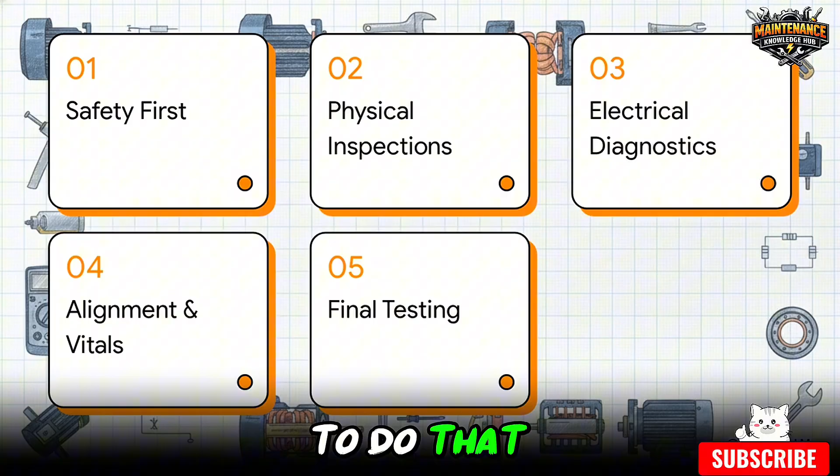To do that, we're going to follow a precise journey today: safety first, physical inspections, electrical diagnostics, alignment and vitals, and finally final testing. Let's get right into it.

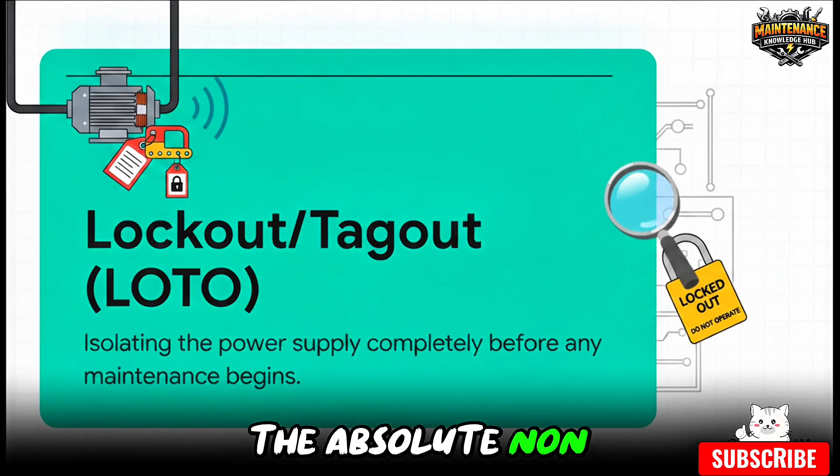Phase 1, safety first, preparing the motor. The absolute non-negotiable rule here is LOTO, lockout tagout. You already know the drill, but it's the vital safety precaution of isolating the power supply completely before any maintenance even begins, making absolutely sure zero power is flowing to our patient is the foundational step of everything we're about to do.

You've got to strictly follow these 5 steps. Switch off and isolate the power, apply your LOTO tags, and—this is the one that always seems to get missed—verify zero voltage with a proper tester. Don't assume. You also need to gear up with the appropriate PPE: safety shoes, gloves, helmet, and goggles. Finally, wait it out and visually confirm the motor has completely stopped rotating.

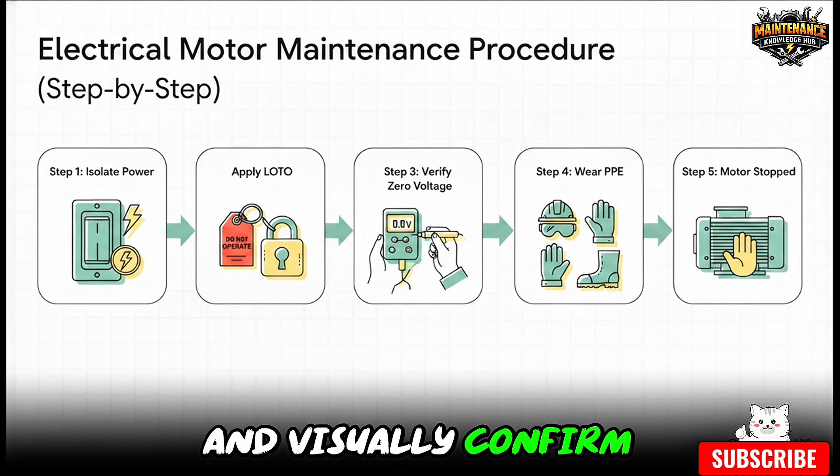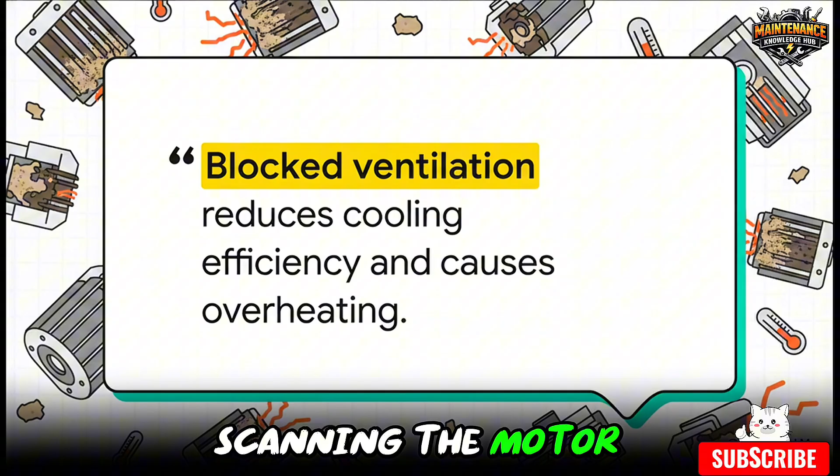Moving right along to Phase 2, physical inspections, the motor's checkup. You're starting with a visual inspection. Scanning the motor body and the cooling fan is absolutely key. Why? Because as the warning goes, blocked ventilation reduces cooling efficiency and causes overheating. This single fact makes a deep physical clean absolutely critical to the motor's survival. Simply put, a dirty motor is a hot motor, and a hot motor is a failing motor.

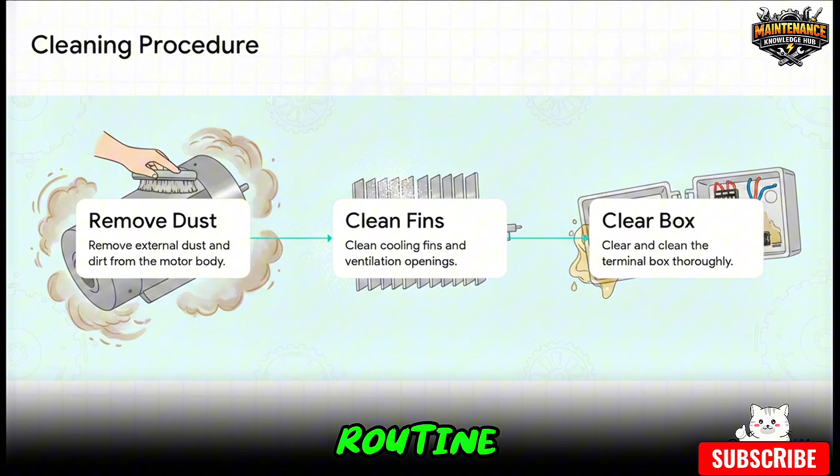So how do we fix that? A strict cleaning routine. First, remove the external dust and dirt from the main body. Next, get into those cooling fins and ventilation openings. Hit them with dry compressed air if you need to. Finally, clear and clean that terminal box, making sure you scrub away any stubborn grease or oil deposits while you're in there.

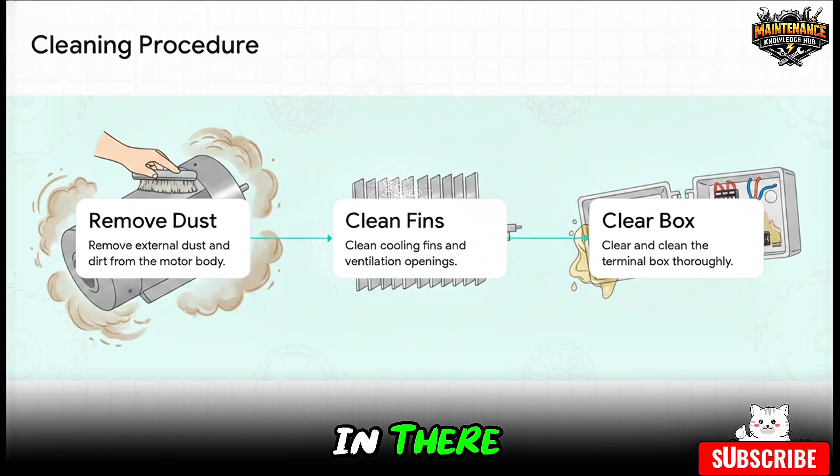Phase 3 is where things get really interesting: electrical diagnostics. We're essentially doing the motor's blood work. We start the electrical inspection with the insulation resistance, or IR test.

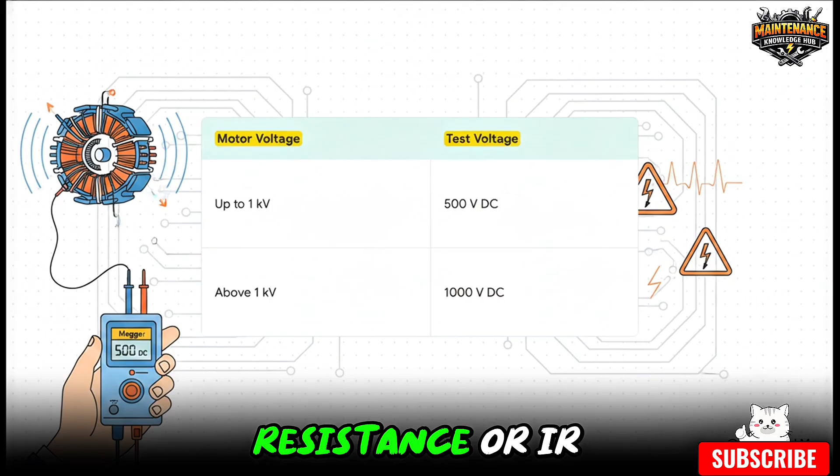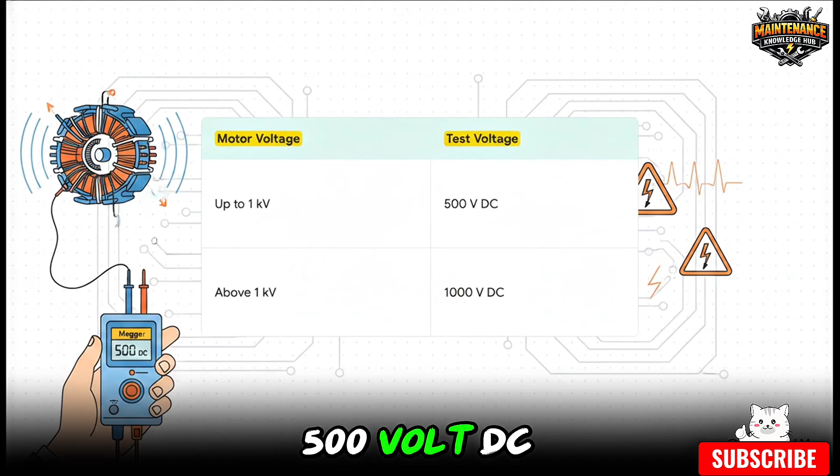If you're using a Megger, you have to perfectly match your test voltage to the motor's specific thresholds. If your motor voltage is up to 1 kilovolt, you use a 500-volt DC test. If it's above 1 kilovolt, you bump that up to a 1,000-volt DC test. And here's the crucial formula: your insulation resistance must be greater than or equal to 1 megaohm per kilovolt plus 1 megaohm. That's your standard acceptance value.

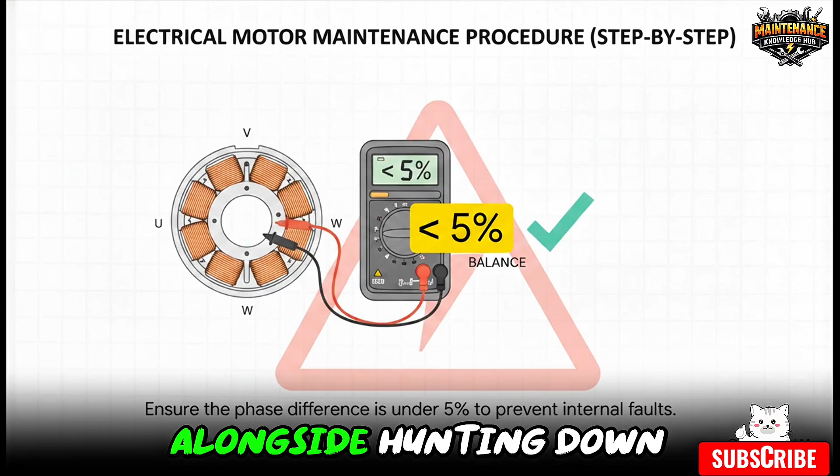If it fails this, you've definitely got an internal breakdown on your hands. Alongside hunting down damaged windings, you've got to check that winding resistance phase balance. The rule of thumb: the phase-to-phase resistance difference must be less than 5%. That's critical for a healthy motor. Anything higher, and a serious internal fault is brewing.

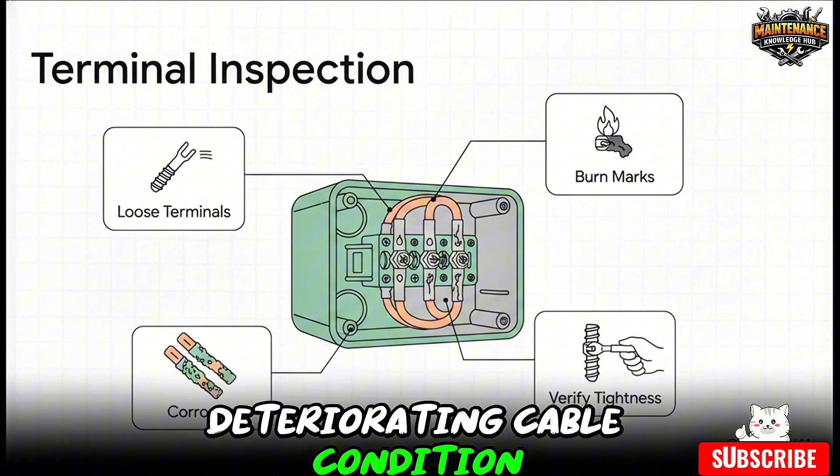Do not forget the terminal connection inspection. Pop open that box and look for the classic warning signs: loose terminals, physical burn marks, corrosion, or just generally deteriorating cable condition. Double-check the tightness of your terminal lugs and torque everything down perfectly to the manufacturer's exact specs.

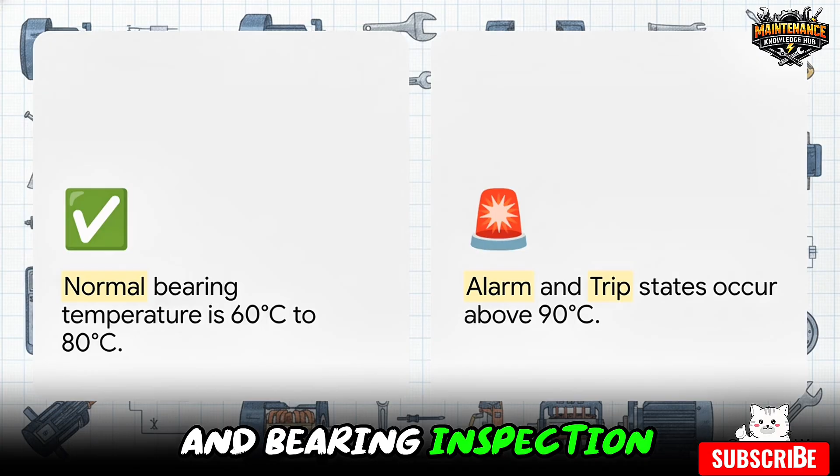All right, Phase 4, alignment and vitals, monitoring the pulse. Now we're on to temperature monitoring and bearing inspection. Grab your infrared thermometer or thermal camera.

Healthy bearings should be humming along nicely between 60 and 80 degrees Celsius. Hit 90, that's an alarm state. Break 100 degrees, your system is tripping. Proper lubrication with the recommended grease is the fix here, but remember, overgreasing can actually be just as deadly as undergreasing.

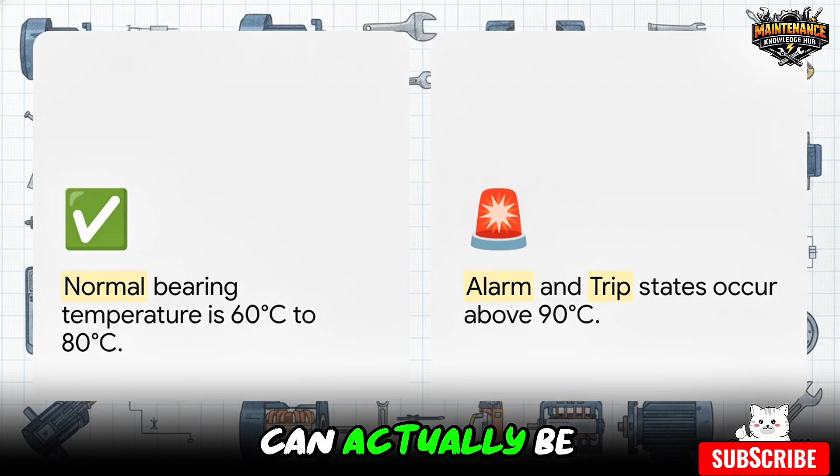Next up is vibration monitoring. For your standard industrial motors, you're looking for less than or equal to 4.5 millimeters per second RMS. Using a vibration meter to confirm that single number is your absolute best defense against internal bearing defects, unbalance, or a soft foot condition.

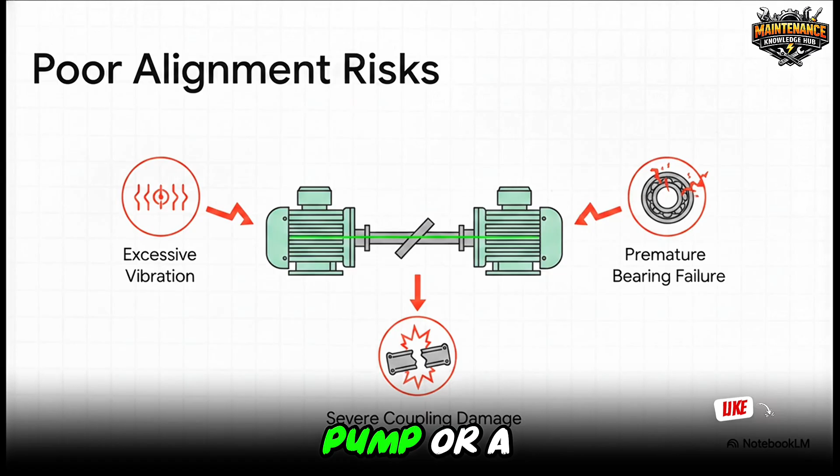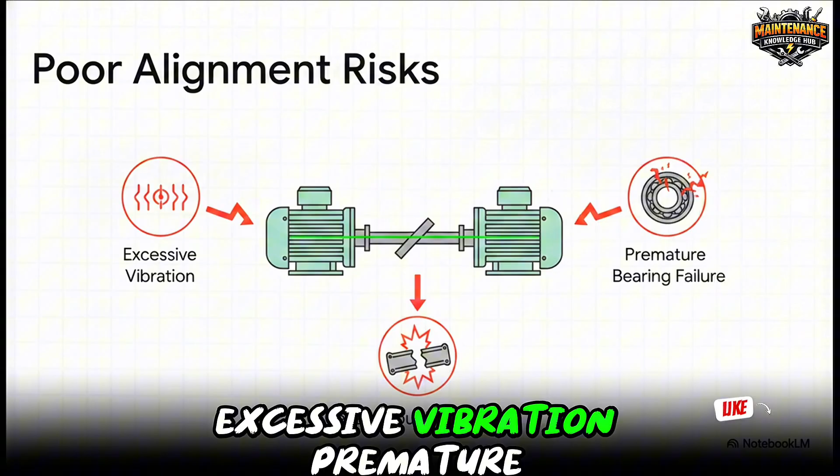And if you're dealing with coupled motors, like a motor pump or a motor gearbox setup, a proper alignment check is mandatory. Skip the precision laser tools, and you're practically begging for these 3 catastrophic mechanical failures: excessive vibration, premature bearing failure, and some really severe coupling damage.

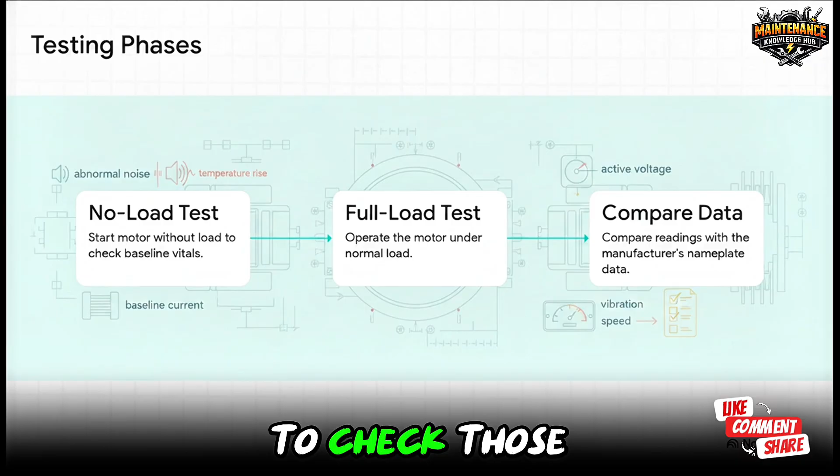Which brings us to Phase 5, final testing, the post-op spin. You want to step this up cautiously. First, the no-load test. Start it up without a load to check those baseline vitals. Listen for weird noises, check the baseline current and temperature rise.

If that passes smoothly, move to the full load test. Run it under normal load and meticulously compare your active voltage, current, power, and speed directly against the manufacturer's nameplate data. Here's the kicker, though.

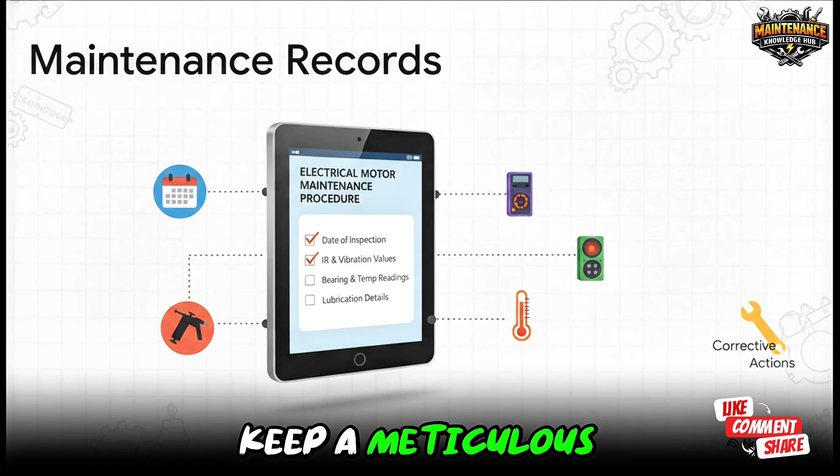None of this amazing maintenance matters if you don't keep a meticulous maintenance record. Note down the date, the exact IR and vibration values you pulled, the bearing and temperature readings, your lubrication details, and absolutely any corrective actions you had to take.

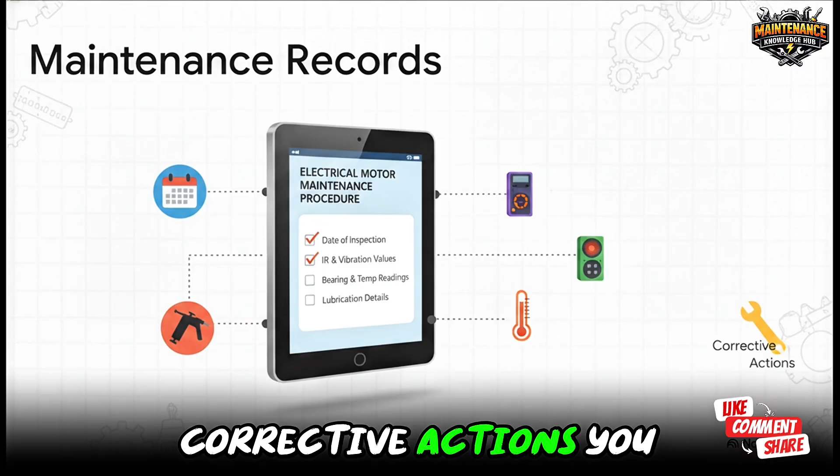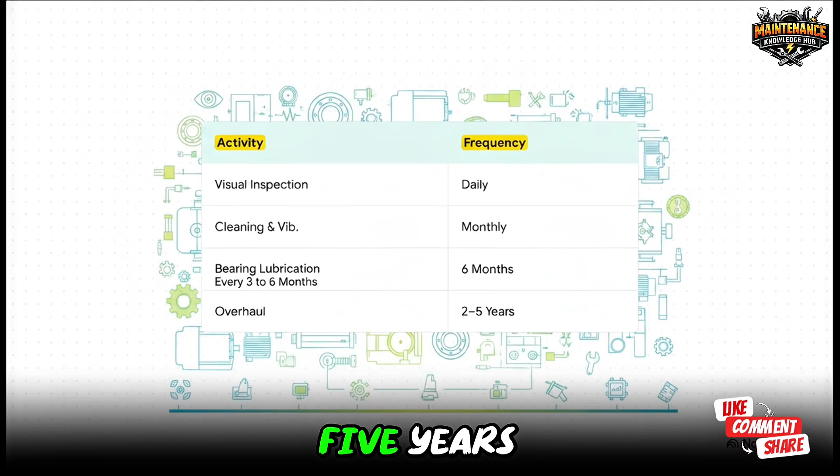So let's end on this. When was the last time you truly listened to your motors? Leave this explainer today, crack open your own facility's maintenance logs, and ask yourself if your equipment is genuinely getting this level of rigorous, step-by-step care. Because a well-maintained motor doesn't just run, it literally drives the future of your entire operation.